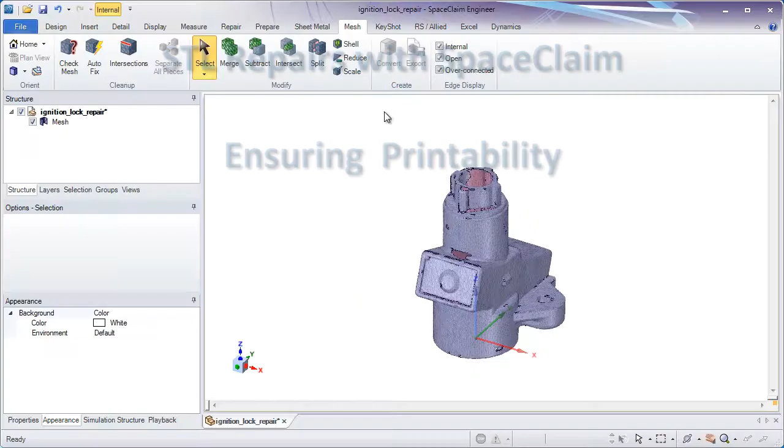In this example of SpaceClaim, we'll walk through the cleanup of an STL file to get it ready for printing.

First, there's a diagnostic feature, the check mesh button, that'll look for things like openings in the model or inverted normals. Next, there's an auto fix button, which finds all those problems and repairs them with one button click.

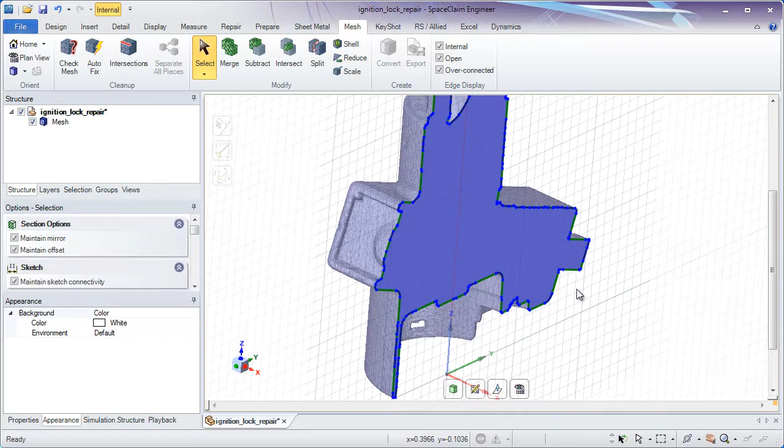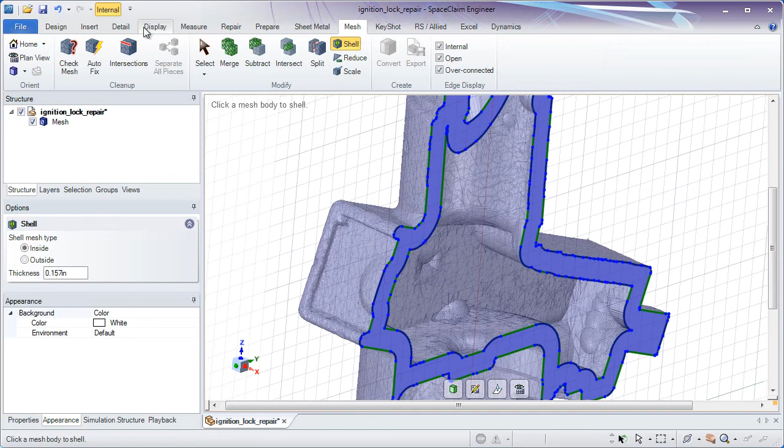So it's a very fast way to make sure your STL is now watertight and ready for printing. You may want to stop there and print the model, or you may want to do some optimization, namely getting rid of material on the inside. The shell tool is a great way to do this. Keep in mind this is a complex set of surfaces coming together, and a pure shell of a solid geometric model may not be possible, but for a mesh file it's extremely simple. That shell tool easily hollows out as much material as you want from the inside.

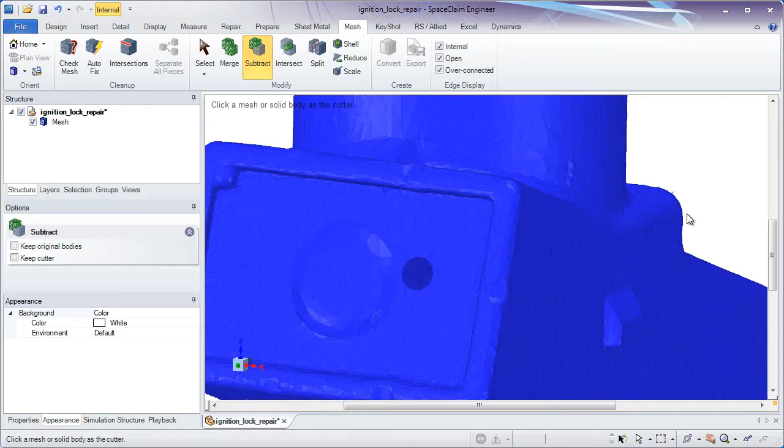Now you may want to create some kind of plug or opening on the model with which you could get the material out after printing. That's exactly what I'm doing here: making a cylinder, moving it to a strategic location, and then using a subtract feature. It's much like the combine tool in SpaceClaim, but it now works with STL files. So there's a nice hole in the model that removes all the material on the inside.

Now you may not want to stop there either. You may want to create some kind of removable plug in the model that you could put back in and seal the model up completely. I'm adding a different cylinder this time, a different location. It's a bit bigger, and my plug will be a little bigger than the opening was before.

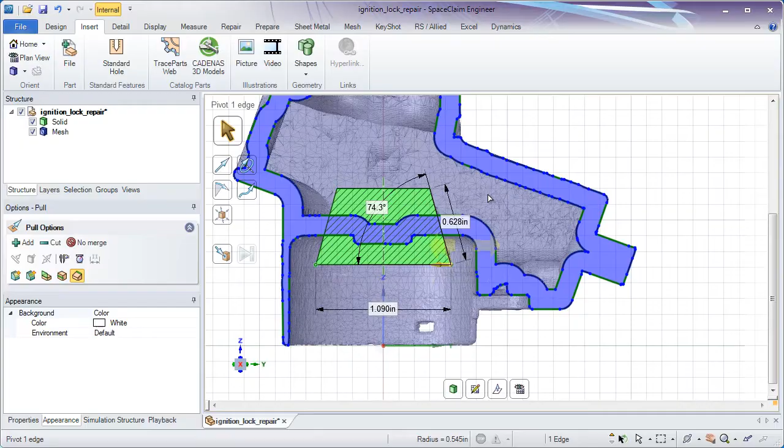Similarly, I need to use some Boolean tools. This time, instead of subtracting material, I want to create the plug using an intersect tool. I'm going to hide the solid and the original mesh, and there's that intersection. That's going to be my plug that I'll use to finish off with.

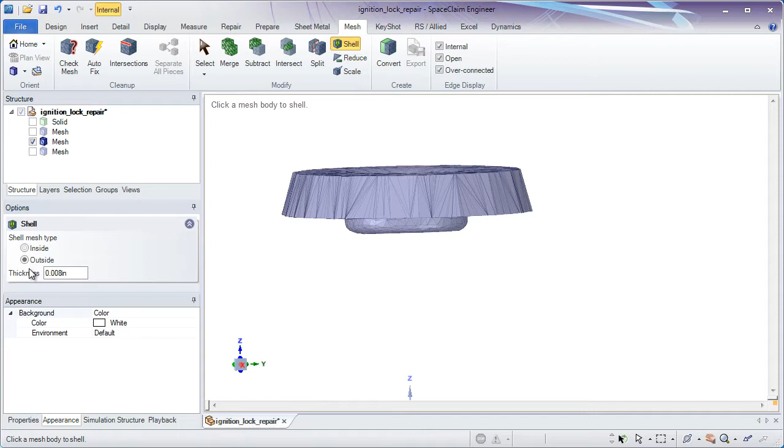A copy and paste operation keeps a duplicate for me. I'm making a duplicate because I need my opening to be a little bit bigger. If I take that duplicate and shell it to the outside, not just the inside shelling, but the outside, maybe a small amount, and then use that to trim material away from the original body, that's going to give me an opening of an adequate size.

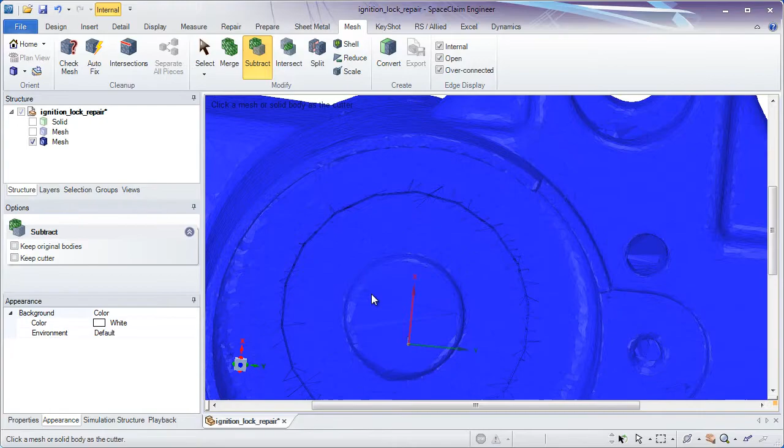So one last operation of these Boolean tools, this time using the subtract tool, trims away material from the large blue STL body. It trims it away, but it still keeps a separate body there. We don't automatically delete it. That's really up to you to decide.

There's a separate 'all pieces' button that breaks up those STLs into different segments. Now that they've been separated, I delete the smaller one and I'm left with just the plug and the large body. It will change color so it becomes a bit more obvious what's going on.

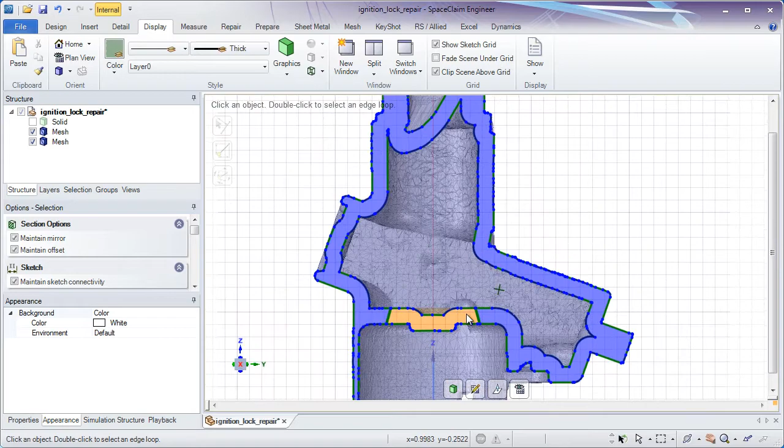Now, going back into cross-section mode, it's simple to zoom in and see exactly that roughly quarter-millimeter offset I created between the two bodies. From that point, you're free to print these out, and you have two separate bodies, and you could move them up and down and see what the interference looks like between the two.